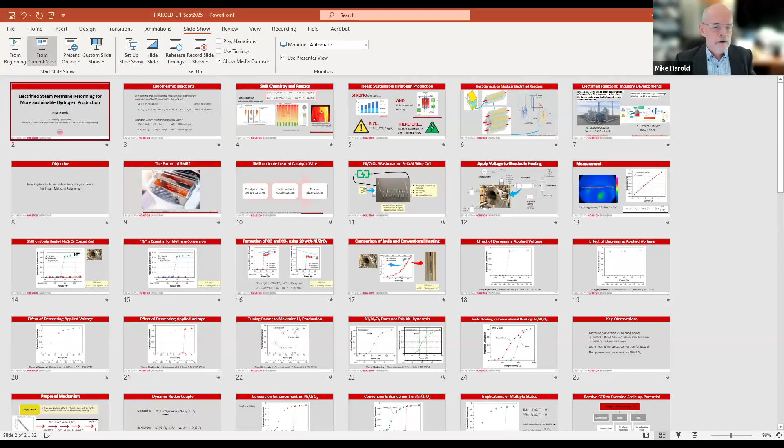All right, again, thanks for joining. I'm going to spend the next 40 minutes or so talking to you about hydrogen and what looks to be a potential new way to make it a more sustainable product.

As we all know, hydrogen is a very important molecule in the energy and petrochemical space, and some believe it's the energy of the future. That will remain a debate for the foreseeable future. Now, this work is done with my graduate student, Elmer Ledesma, who is on the call today. We will have a Q&A at the end of the talk.

So let me proceed. As a background, as we all know, there are endothermic and exothermic reactions. A large host of industrially important reactions require significant amounts of heat to bring the reaction up to temperature and to overcome equilibrium limitations. I'm denoting that by an A plus B kind of reaction.

Now, the way industry conventionally provides the heat or energy to enable the preheating and then overcoming the heat of reaction is through combustion. I'm denoting that here by an oxidation reaction with a much more negative delta H compared to a potentially very large delta H for the desired reaction.

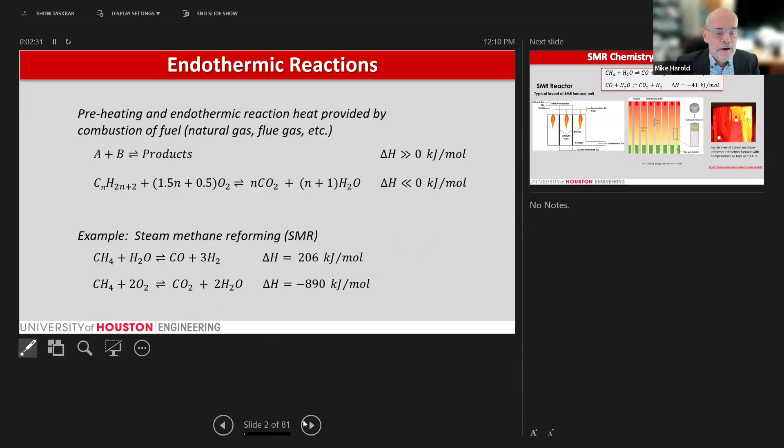Now, I'm going to spend the entire talk talking about steam methane reforming, or SMR for short. That's a very important endothermic reaction in industry. It's the main route to hydrogen. It has a delta H of 206 kJ per mole of methane reacted, compared to combustion, which, if one considers the same reactant oxidized to generate the heat, generates an exothermic reaction heat of 890 kilojoules per mole. But it also generates carbon dioxide, another very important molecule.

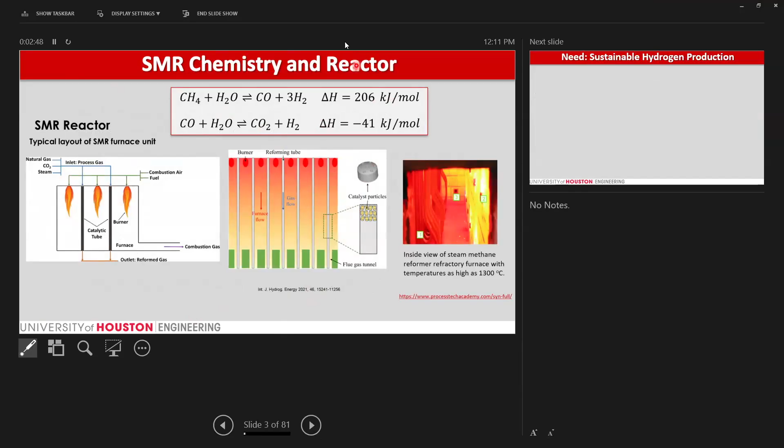Hey, Mike, your presentation is not in presentation mode. Oh, sorry, display settings. Okay, right, thank you, so do the swap.

Yeah, okay, thank you. So methane steam reforming main reaction is shown here, generating 3 moles of hydrogen per mole of methane reacted. It's endothermic and more favorable at high temperature, obviously. Now, a side reaction is the infamous water gas shift reaction. It converts CO basically to CO2 and is thought to approach equilibrium at high temperature, but it's a mildly exothermic reaction.

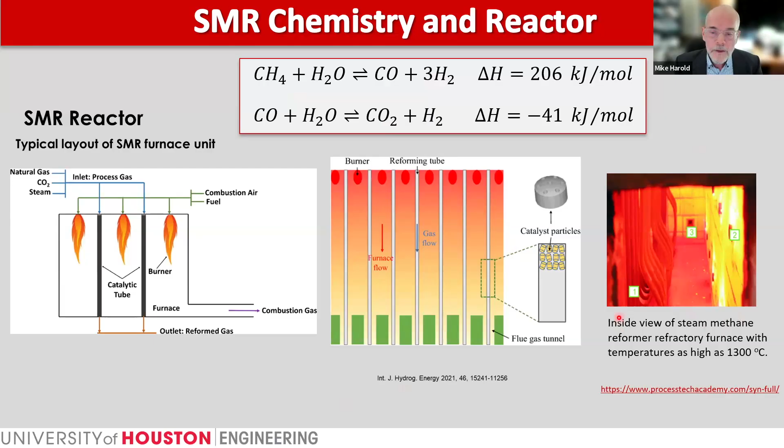Now, industrially, these reactions are carried out in tubular, packed, catalyst-packed tubes, many of them put into a combustion box where the chemistry is carried out. Temperatures as high as really 1300 degrees centigrade are obtained in this hot box where a fuel is burned, generating carbon dioxide. And that's the way it's been done for many decades.

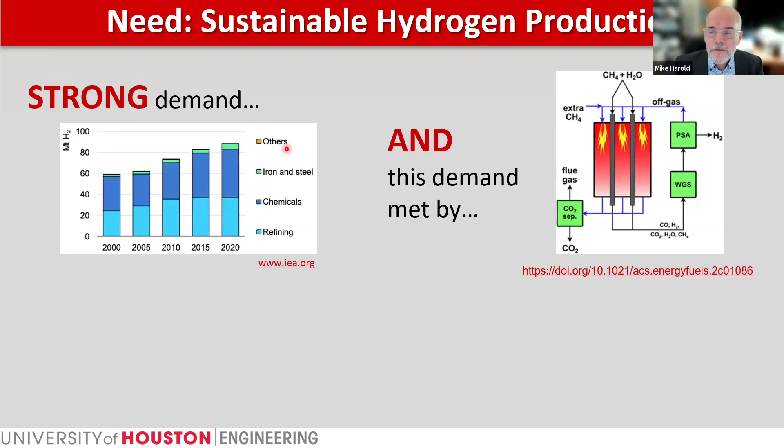But that's done in an unsustainable way from a CO2 standpoint. This is a huge carbon footprint process. Nominally 10 kilograms of CO2 are produced per kilogram of hydrogen generated. And this poses a real challenge. So how can we reduce that number down to a manageable number to make hydrogen more sustainable? And that's where decarbonization comes in.

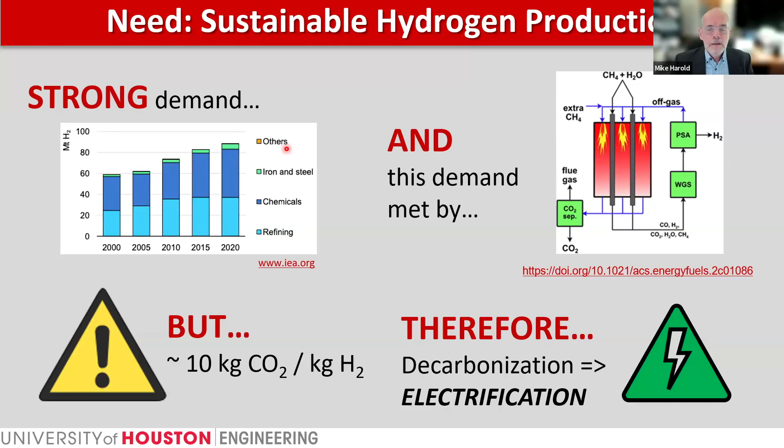So the Energy Transition Institute, one of the main topics of interest is decarbonization, and in particular, electrification. Now, the argument is that if one can provide heating through electrification and the source of the electrons are renewable electrons, then we potentially can take down this low-hanging fruit and make SMR more sustainable.

Now, my colleague, Professor Vemuri Balakotaiah, published a paper with Ram Ratnakar from Shell a few years ago in AIChE Journal and proposed a new mode of carrying out endothermic reactions. Their particular focus was ethane steam cracking, but SMR would certainly be in the same family of reactions.

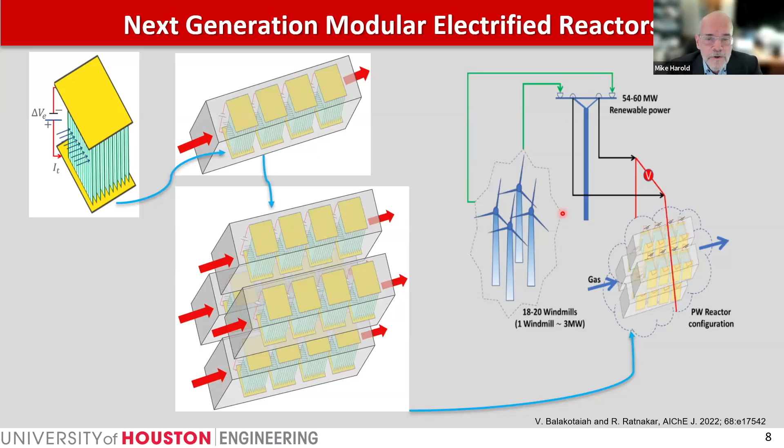Their argument is connecting modules of reactors to electricity sources such as wind and solar, which obviously are renewable sources generating minimal CO2. Those electrons are then used to ohmically heat substrates wherein the catalyst is either deposited or in the same locale as the heaters. So in principle, the idea is to replace combustion as the energy source with ohmic heating from renewable sources going forward.

Now, this is an active area of research. Dow and Shell are teaming up, as are BASF and SABIC with Linde. These are European projects where electrification is being used to do steam cracking of ethane to ethylene, the main route to commodity chemical ethylene.

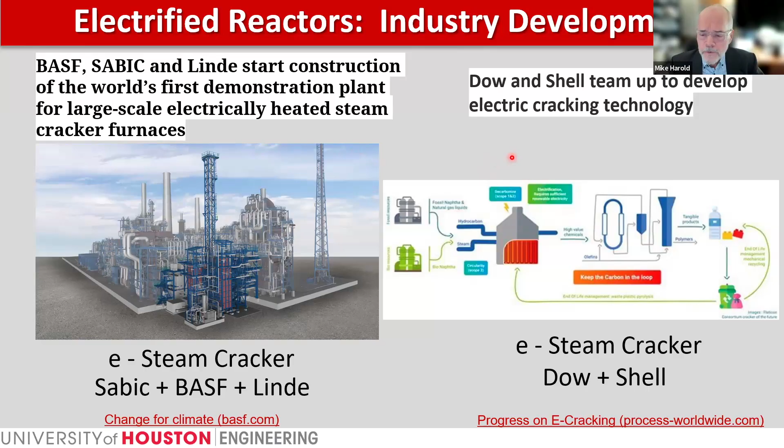That also being a strongly endothermic reaction, the thinking is to make that process similar to SMR more sustainable. The approach these companies are taking is to use metallic tubes ohmically heated using resistive metals, packed with catalyst in close proximity to the hot wall, as opposed to bringing heat in through a furnace box. So these are ongoing and really exciting projects.

Now, the objective of our research, which over the past few years was supported by Shell, is to investigate a Joule-heated coated catalyst concept for steam methane reforming. I'm going to walk you through some experiments that Elmer carried out and our ideas about what we're observing, which I think you'll find pretty intriguing, like we did when we went into this project.

Now, how complicated can it be? This is not to be too facetious, but just to emphasize a point. We all know ohmic heating from our everyday lives. This is a toaster. You pass current through a resistive metal. It glows and gets very hot due to the friction imposed by flowing electrons through the metal lattice. Joule heating is well known.

Now, our idea is, taking a cue from these wires shown in the toaster, what if we coat these wires with catalyst, SMR catalyst namely, and carry out steam methane reforming on an electrically heated and coated wire? So that's the idea.

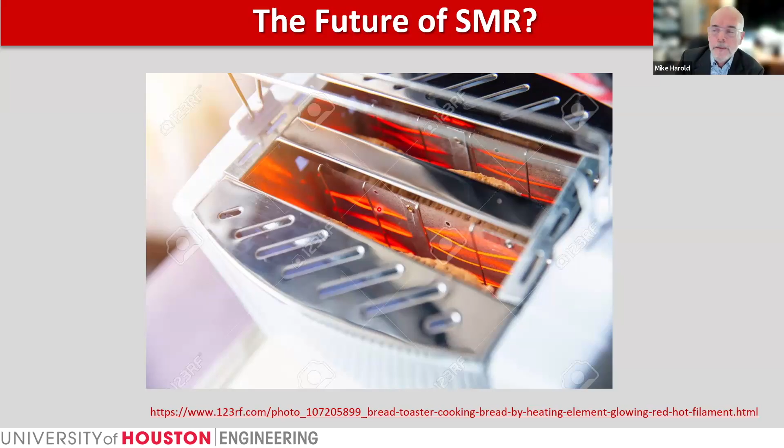Okay, so I'm going to walk you through our experiments. We work from the ground up. We prepare catalyst and test it in a lab scale reactor, then make observations and learn from these measurements at a fundamental level, but more importantly, come up with some ideas on how this might be scaled up if it works.

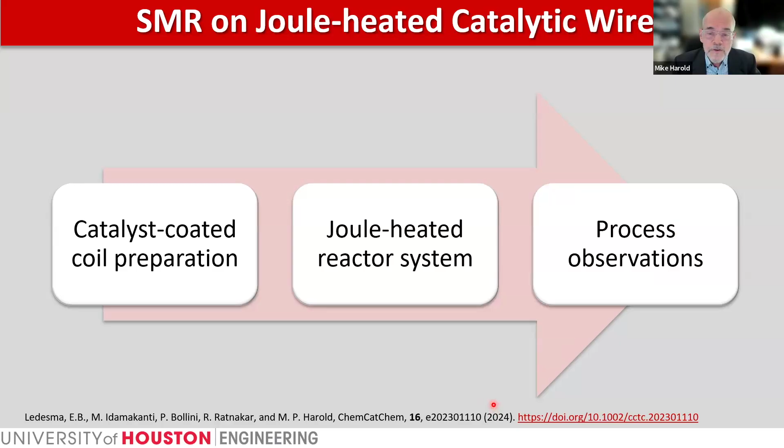For those of you interested, we have a paper published in 2024 that gives some of our earlier results from this project. Today I'm going to show some of those and some recent measurements that Elmer has made in the lab.

Now, we start with a coil. This is an iron, chromium, aluminum metal, otherwise known as Kanthal. It's a common material that has the right kind of conductivity range wherein one applies a voltage across the wire and it heats up to a temperature of interest. This is basically the reactor in the experiments we're doing, about 0.5 millimeters in diameter. This particular wire is about 45 centimeters long with 11 turns.

For those electrically engineering interested folks in the audience, this is basically a solenoid. One can produce a magnetic field by putting current through this coiled wire. I'll get back to that a little bit later.

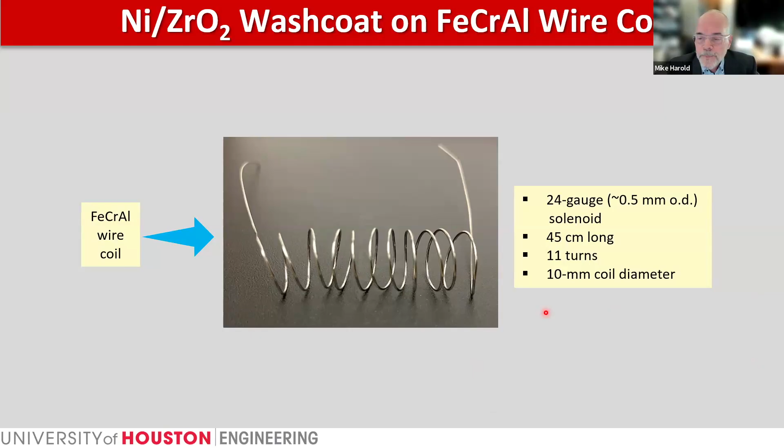Now, the experimental setup is straightforward. First, we make the catalyst. The catalyst will be nickel-based on either zirconia support or alumina. The choice of the support, as I'll show today, is critical.

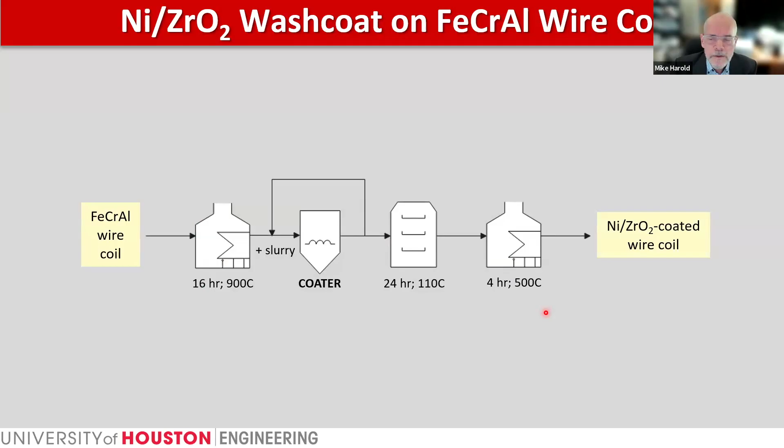Now, we do this coating in Professor Praveen Bollini's lab with his student Meghana, producing a coated FeCrAl wire with a very thin layer of nickel zirconia. The wash coat thickness, depending upon the gravimetric loading, the mass per area, is nominally 10 to 20 microns thick, not unlike the wash coat we would see in a catalytic converter in our car.

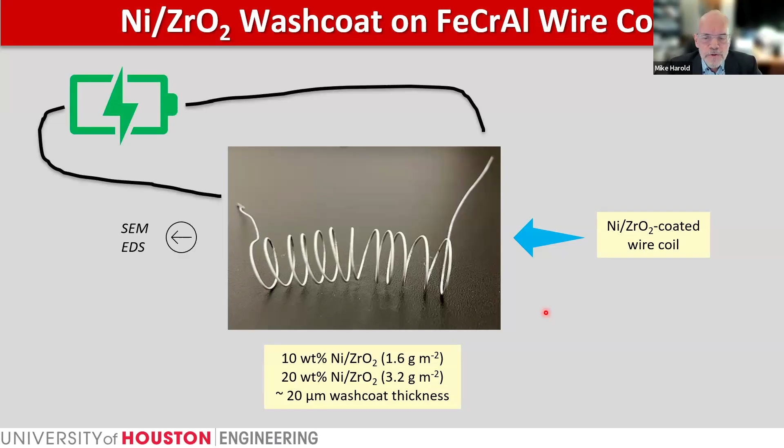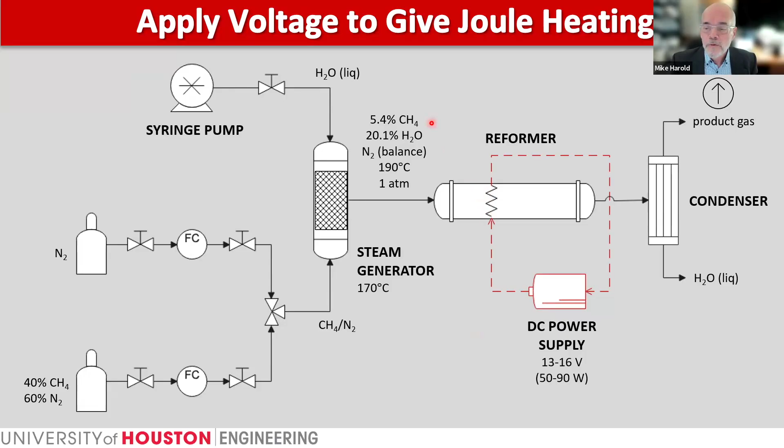Using a somewhat diluted methane steam reforming feed of nominally 3 to 4 steam to methane ratio. We do some preheating, and then the bulk of the heating is done by the ohmic process, the Joule heated process. This is a picture of the coil spanning the cross-section of the tube.

This is not a well-designed reactor. When you look at it immediately, you can see there are potential regions for bypassing. Just envision that the ultimate reactor would be a staggered line of these coils down the length of the tube. The experiments we carried out have been so far with a single coil.

So we apply a DC voltage in the range of 13 to 16 volts. That produces a power for the given resistance of the FeCrAl of between 50 and 90 watts. We then collect the effluent and characterize the unreacted methane, the produced CO and CO2.

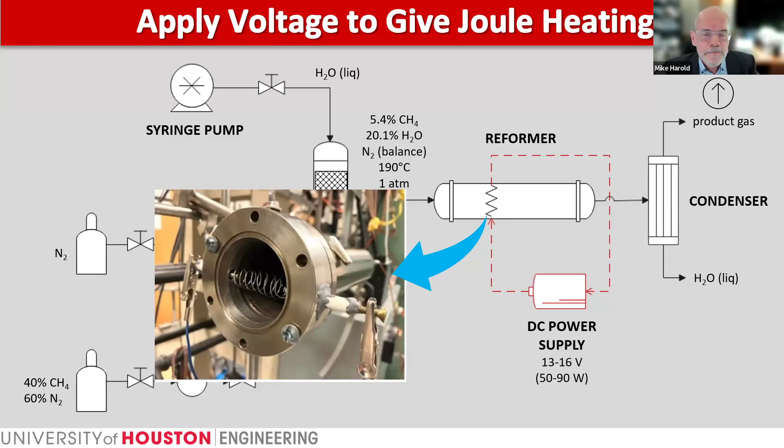Now, this is an infrared camera measurement of a straight wire in which we've applied nominally a few volts across the length of this shorter wire, showing the temperature exceeding 450 centigrade. On the right is the measured temperature, which is a linear function of the current, with the standard expression for I squared, V squared over R.

So an energy balance for the non-reacting wire would include radiative losses, convective removal of heat from the wire, balanced by the ohmic heating. One can solve this equation for temperature and get very good agreement between the measured average wire temperature and what simple theory predicts.

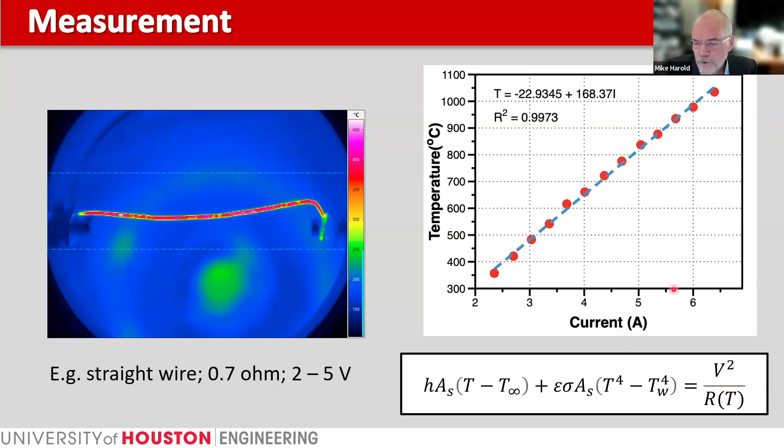So let me show you some results. This is literally one of the first experiments that Elmer ran, for a 10 weight% nickel on zirconia support that's coated on a FeCrAl wire, then subjected to a range of imposed power between 50 and nominally 90 watts.

Along with the coated wire is the uncoated wire, shown in the red squares. The green line for this particular set of conditions is the predicted equilibrium conversion. There are some notable attributes of these data. First, as we would expect, the conversion goes to a high value at sufficiently high temperature.

The temperature measured or predicted by that energy balance shows that upwards of 800 degrees centigrade, pushing 900, the conversion of methane approaches 90%. That is not an unexpected result. We expect an endothermic reaction whose rate increases and whose equilibrium becomes more favorable to have a conversion approaching, hopefully, completion.

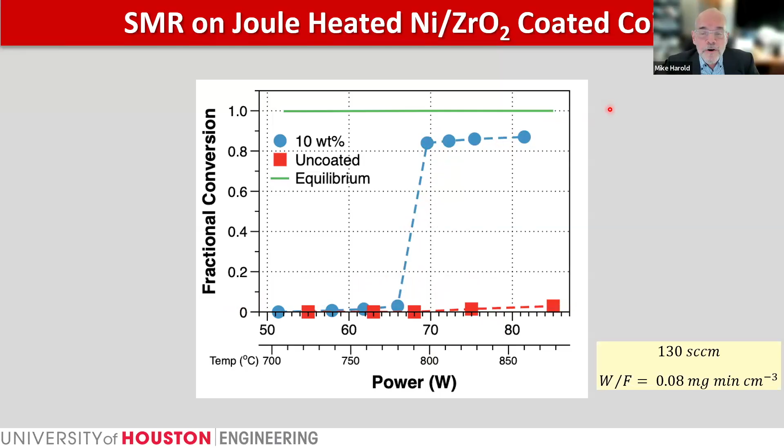Interestingly, we observed this sudden discontinuity in the conversion versus the imposed power or temperature, which was kind of an unexpected result. We went into the experiment thinking we would get a nice, smooth sigmoidal curve from a low conversion regime to a high conversion regime. The focus of this talk is going to be on this discontinuity, in large part, as you'll see as I walk through the data.

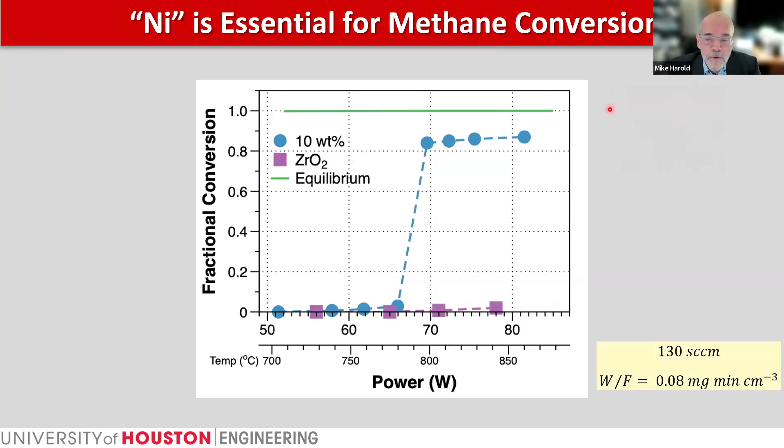So we compared the nickel zirconia to a nickel-free zirconia to check for sure that the nickel is the source of the activity. And indeed, this is the zirconia without nickel, showing very low activity at higher temperature.

The measured CO and CO2 per mole of methane fed is shown on the left and right, and you can see that the results follow quite nicely the predicted equilibrium distribution of CO and CO2.

What's kicking in at higher temperature is the reverse water-gas shift reaction, where produced hydrogen is reacting to push the CO2 back to CO. That's why we get a maximum in the CO2 yield and an increasing CO yield with increasing temperature.

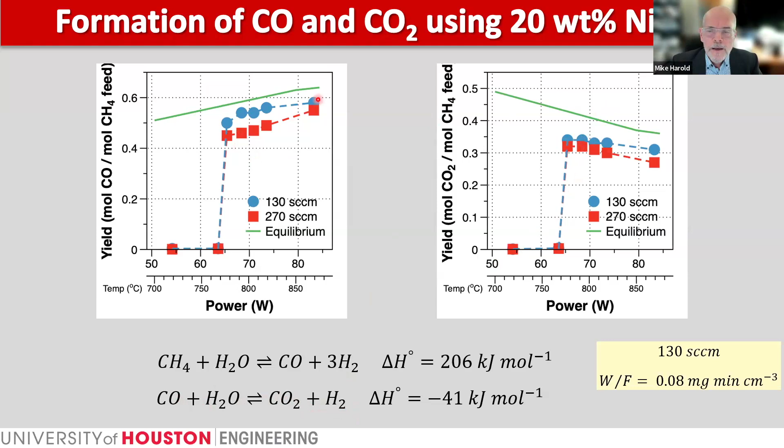Now, what's going on here? I'm replotting the nickel zirconia data in blue, obtained with the ohmically heated wire. I didn't mention that the gap between complete conversion and nominally 90% we attribute to bypassing through the spaces in the cross-section of the tube closer to the wall — unreacted methane that is not seeing the catalyst, quote unquote.

Now I'm comparing these data to what I would call a conventionally heated wire. In this case, Meghana from the Bollini lab took the same length wire, snipped it up with scissors, put the pieces into a tube, and carried out a more normal fixed bed reactor experiment where the heat is provided through the wall within a conventional clamshell furnace.

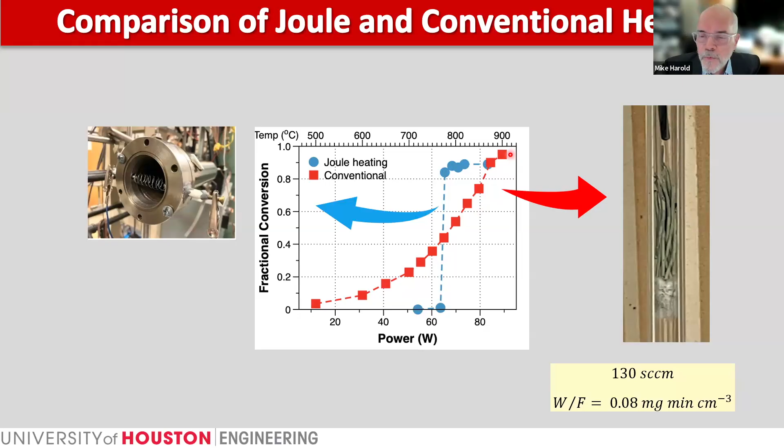Interestingly, you can see notable differences between what we had expected to see in the red and what we did see in the blue with the ohmic heating. At very high power, the conventionally heated wire approaches complete conversion, as you would expect, with no bypassing. So we see the bypassing difference out here.

At lower temperature, we get the conventional setup outperforming the ohmic heating, but interestingly, there's a range of power where the ohmically heated wire outperforms the conventionally heated wire. That was a puzzling result at first, and that's what I'm going to try and walk you through — our thinking.

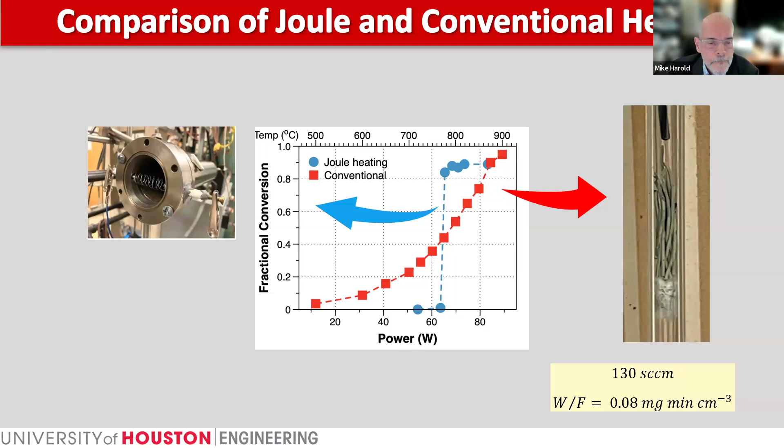Now, I prodded Elmer because I have an interest, over the years, in other projects involving what's called steady state multiplicity, where reactions and reactors exhibit multiple steady states, manifested typically as hysteresis phenomena.

The puzzler here is that, as we know, methane steam reforming is endothermic, and conventionally it's only exothermic reactions that exhibit this thermal feedback effect leading to multiple steady states. So keep that thought in your mind as I continue to walk through the data.

Now, Elmer continued to slowly reduce the power and measured steady state conversion that went beyond the ignition power, nominally about 56 watts, to a much lower power, down to nominally a little bit less than 15 watts, where the reaction died. So for a pretty wide range of power, the catalyst can either exist in a very low conversion state or a much higher conversion state.

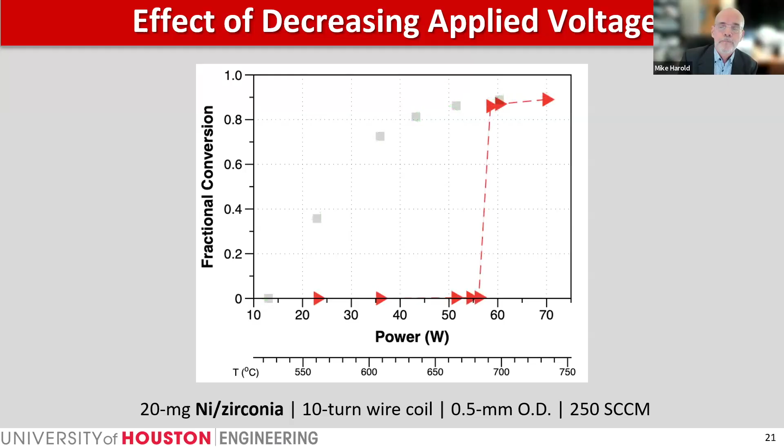Interestingly, before I get to some mechanistic aspects, if one calculates the moles of hydrogen produced per kilowatt hour supplied, which Elmer has done, it's interesting to note that there's a kind of maximum utilization of the provided energy, electrical energy, through Joule heating that maximizes the production of hydrogen along this high branch. Too high of a power leads to diminishing returns as the conversion approaches completion. Too low of a power does not produce enough hydrogen. There's actually a sweet spot where one gets a nice balance, or a maximum in the hydrogen production or energy utilization.

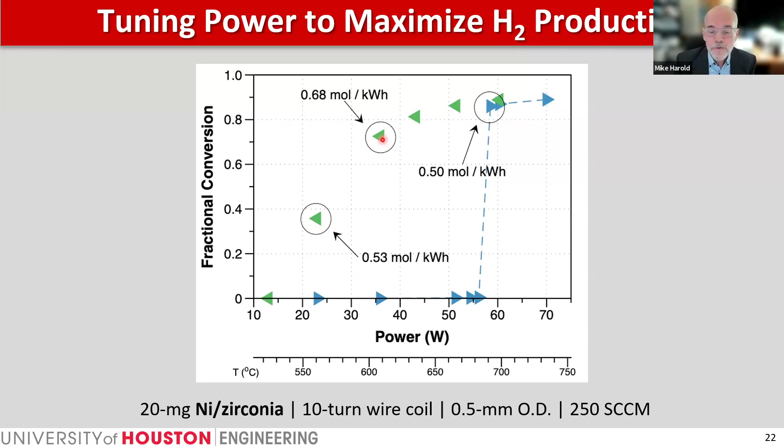Now, let me show you a few more observations in Elmer's set of experiments. We decided to go and compare the zirconia catalyst support to alumina, which is actually a more conventional support for steam methane reforming catalysts. Interestingly, when we carried out similar experiments with the FeCrAl wire, now coated with a nickel alumina catalyst with the same amount within experimental error, whether we increase power or decrease power to that coated wire, we do not see any weird ignition, nor do we see multiple steady states. So a notable observation here is that the support does matter, and it is playing a role in these interesting observations that I've presented to you so far.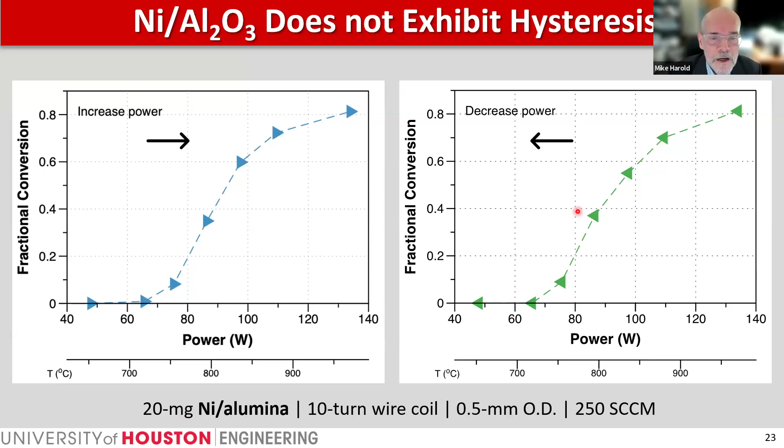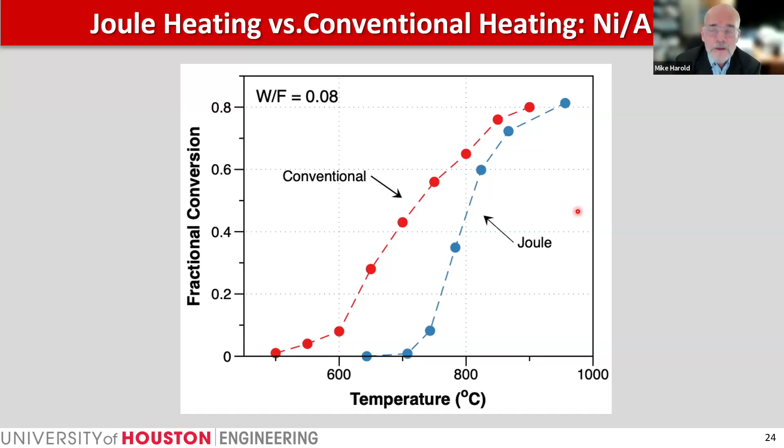Now, additionally, with alumina, we never see a range of temperature wherein the Joule heated wire outperforms the conventionally heated wire. The conventional heating always gives a higher conversion of methane at a given temperature than the Joule heated wire when alumina is the support. Again, that is not the case with zirconia, as I showed you earlier.

So let me stop here and kind of recap the data that I've shown you. First of all, the methane conversion versus applied power for nickel zirconia exhibits an abrupt ignition and steady state hysteresis of methane conversion versus power/wire temperature. On the other hand, nickel alumina shows a more conventional unique steady state. Furthermore, the Joule heating for nickel zirconia enhances the methane conversion over a range of power settings, but there's no apparent enhancement for nickel alumina.

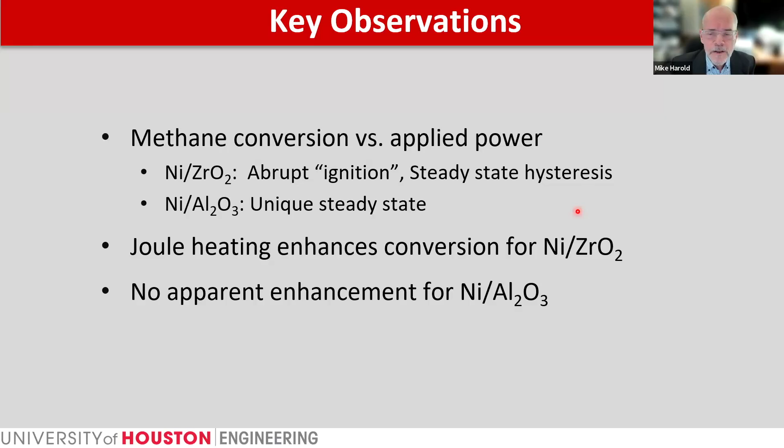So really, what's going on here? We have multiple steady states, not expected for an endothermic reaction. We have an important effect of the catalyst support. We have no apparent activity of a wire that does not have nickel as part of the coating. And again, there's a notable difference between the catalyst support on which the nickel is impregnated.

So what's going on? Well, that's going to lead us to a mechanism, and we've considered several mechanisms. This one, we believe, checks all the boxes, but it's definitely up for debate. So let me walk you through our hypothesis. We believe what's happening here is an electrocatalytic effect.

In essence, conduction within the zirconia support layer serves to reduce nickel cations to nickel metal, increasing activity. Now, that statement implies the fact that it's known in the literature that reduced nickel, instead of say nickel oxide or nickel hydroxide, is more catalytically active for SMR than is the oxide or hydroxide. So we're hanging our hat on that known fact.

Now, let me walk you through what we think may be happening. So this is a schematic of the interface between the underlying FeCrAl wire and the nickel zirconia. It's obviously not to scale. So this line here is the interface. Again, the thickness of this support layer or catalyst layer is tens of microns. The FeCrAl wire, on the other hand, is about half a millimeter in diameter. So it's a thin layer.

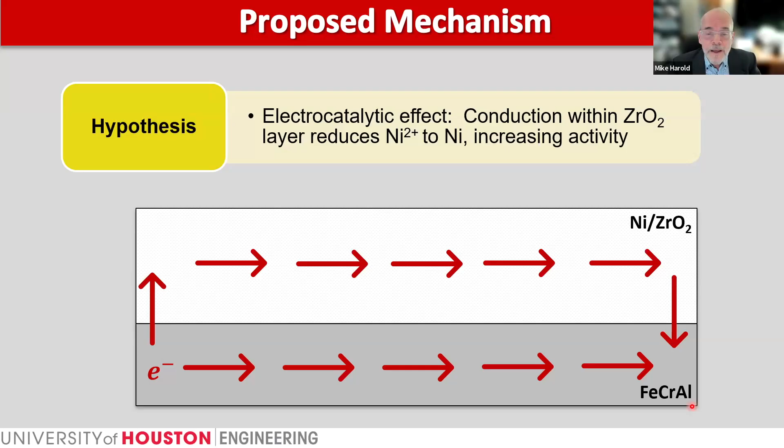Now, under conditions of applied voltage, the electrons are obviously flowing through the FeCrAl because this is leading to an excessive heating of this resistive metal. What we believe is happening is that some of the electrons, to be quantified, are diverted through a nominally conductive zirconia layer that's supporting the crystallites of nickel catalyst. These electrons are interacting with the nickel in a reductive sense, leading to enhanced activity.

Now, why do we say that? Well, zirconia is actually in the class of semiconductors. It has a conductance shown here in some data from the literature, kind of an Arrhenius plot of conductance versus 1/temperature that is activated. So increasing temperature leads to higher electrical conductivity of zirconia, unlike alumina, which is more of an insulator. So what we believe is happening is as we increase the power to the underlying FeCrAl, when we reach a certain temperature of the catalyst wire, and hence the top layer, the zirconia becomes somewhat conductive, enabling electrons to flow through it, which contacts the electrons with the nickel cations.

As a result, the electrons have the opportunity to do an electroreduction of the nickel oxide/nickel hydroxide to nickel metal. And as I mentioned a few minutes ago, the nickel metal is known to be a more active catalyst for SMR than is the cationic-based nickel. Now, this is a conjecture that we have to prove, obviously.

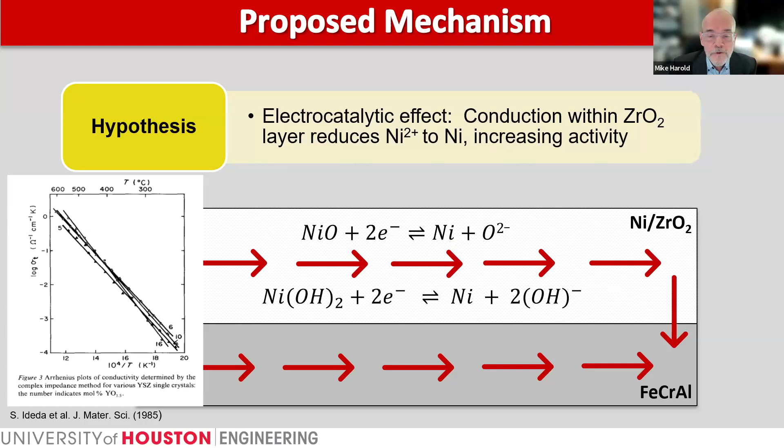But this looks to be an explanation for the observations I've shown you so far. So we essentially have a dynamic redox couple, we believe, in the top layer that involves directly electrical current. The reduction, which I'm reproducing here, could be represented by nickel hydroxide being reduced to nickel metal, producing hydroxide anions, which then can undergo further reaction.

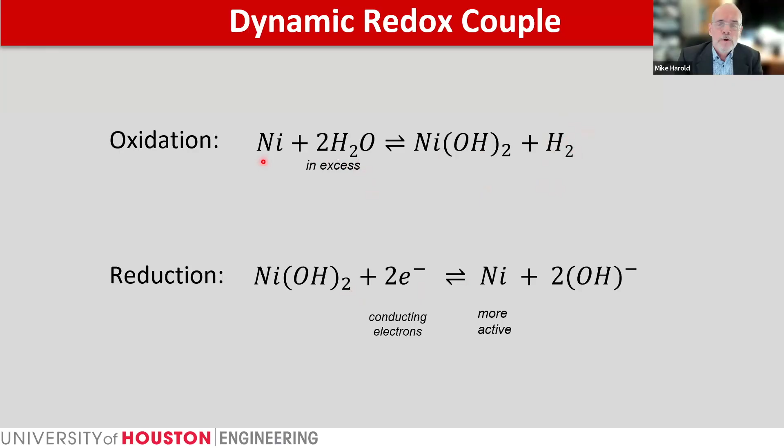So Elmer came up with a clever experiment and asked the question: well, what is the role of hydrogen here? We do know that it's the main product from the SMR. Is it possible that the hydrogen that's being generated is pushing this reaction to the left? Well, one way of testing that is to add hydrogen.

So I'm now re-showing data that I've shown you earlier. This is for a particular 10-turn wire coil. The flow rate here is fixed at 250 cc's per minute. The green triangles are obtained on the nickel zirconia, and these are steady states that we believe exist because of the electroreduction of the nickel oxide and nickel hydroxide. Interestingly, when we add a small amount of hydrogen to the feed, nominally 2%, remembering that the feed methane concentration is 5% and steam is approaching 20%, we get the blue circles.

So we basically follow the same trajectory of the conversion that we obtain in the absence of hydrogen. Now, that may not be a surprise, but what is notable is that with the addition of hydrogen, the lower steady state is completely removed. So this red lower steady state with the ignition obtained without hydrogen addition is no longer present. And so in an experiment starting at low power and proceeding to high power, we follow basically this high branch that would only exist at lower power when hydrogen is not added. But with hydrogen added, we follow this trajectory.

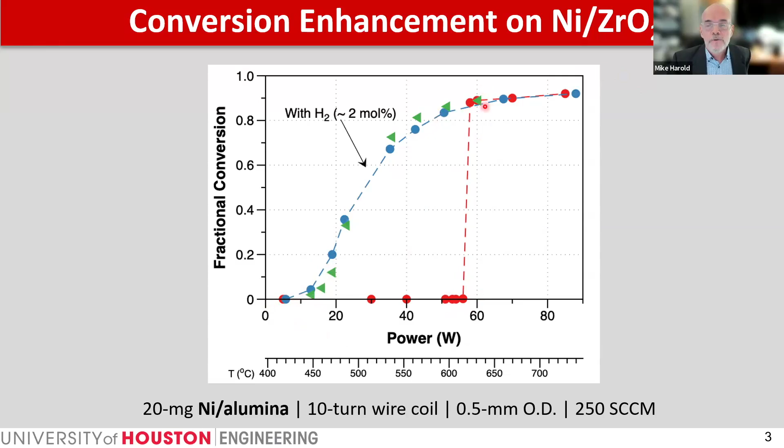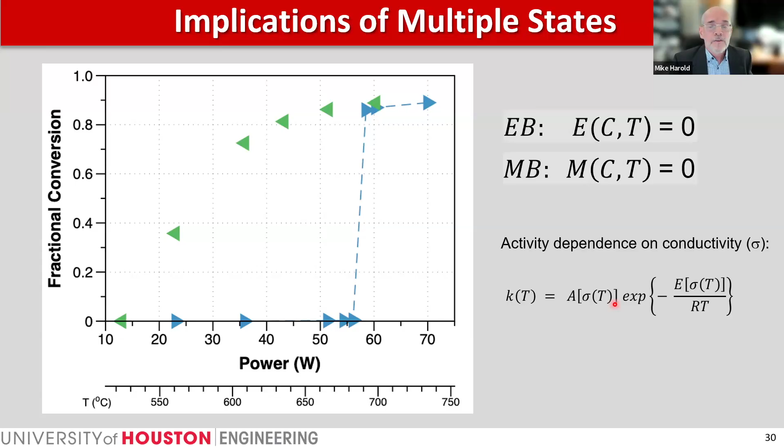Now, interestingly, from a fundamental standpoint, we have to answer this question, which we've not yet answered: how can we actually predict the existence of multiple steady states for an endothermic reaction? What I'm suggesting here is something we still need to do, but we believe that we're getting catalytic enhancement due to the flow of electrons through the catalytic layer, which is serving to affect the activity of the nickel catalyst. One way of testing that would be to semi-empirically make either the activation energy or the pre-exponential factor a function of the conductance, which itself is a function of temperature, and to put that into the energy and material balances and see if the resulting mathematical model exhibits or predicts multiple steady states. We've not done that yet, but we will be attempting that in the coming weeks.

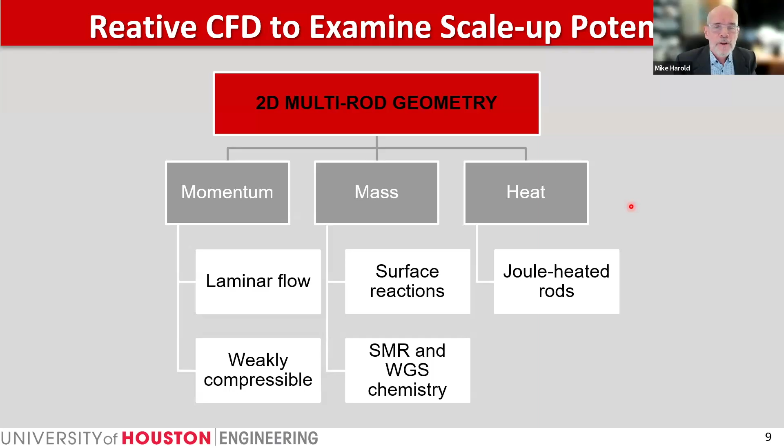Now, I want to finish off the last few minutes just showing that we're not stopping with experiments. We're doing some simulations. Elmer is applying COMSOL with good old reaction engineering analysis to analyze different variants on the reactor that we envision could result from this electrically heated wire experiment that was confined to one wire.

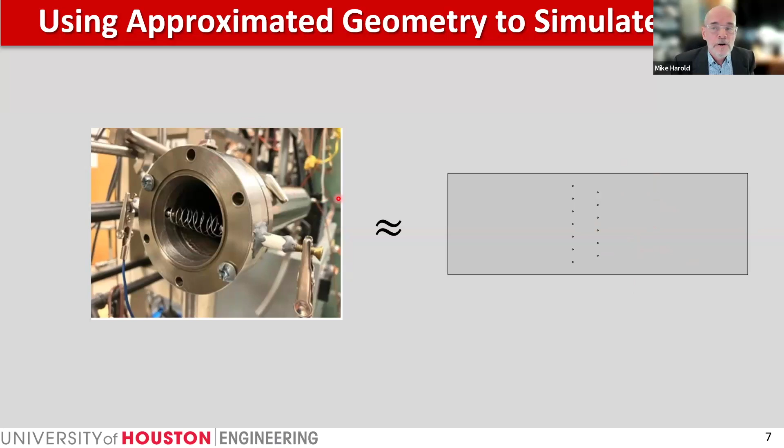Now you'll have to humor me, but I'm showing the experiment on the left with the coil and arguing that in a two-dimensional envisioned reactor, looking at it from the side, we would have a set of rods or wires that are parallel to one another and staggered in two layers here. Our approach in the synthesis of possible reactor types is to cascade many layers of wires along the length of the reactor tube to simulate a multi-wire or multi-rod reactor. So the approach that we take is to take known kinetics of SMR from the literature.

This is from the Guy Marin group in Belgium, from AIChE Journal. We take those kinetics, put them into the material balances appropriately. We have energy balance, diffusion and reaction within the catalytic layer. And then COMSOL allows us to simulate the local environment of the coated wire.

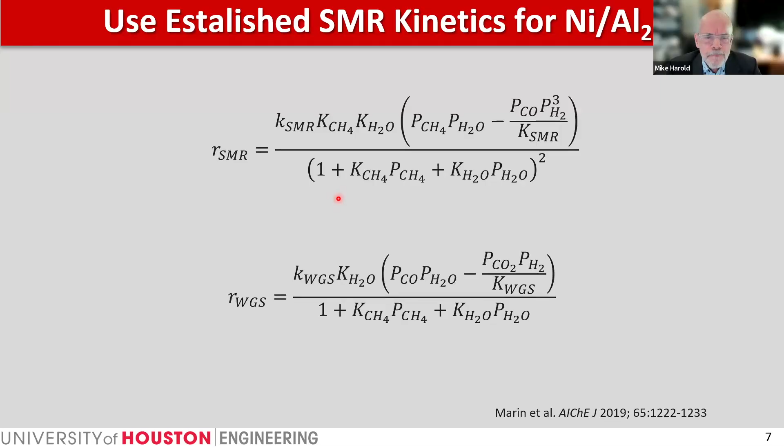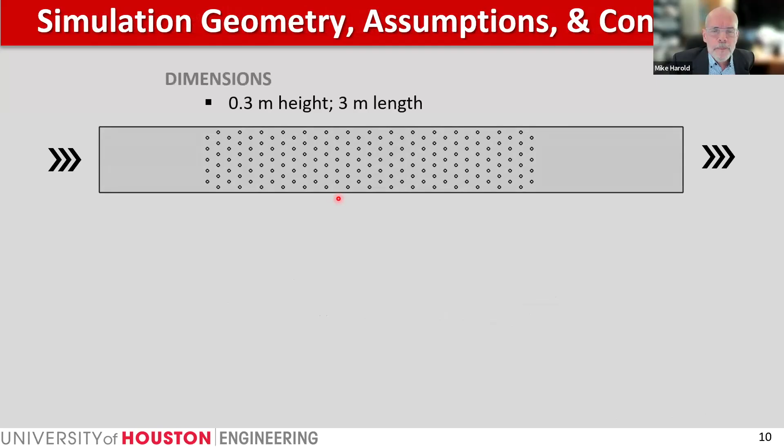Wires, I should say. Now, our envisioned reactor is shown here schematically. So we have flow from left to right. These are all rods in this case. Here's our inlet conditions, and I'm just showing you some results of some simulations with these conditions in mind. So a 30% methane, 70% steam with these conditions coming in, preheated, atmospheric pressure, fully developed flow, and here's the volumetric flow rate.

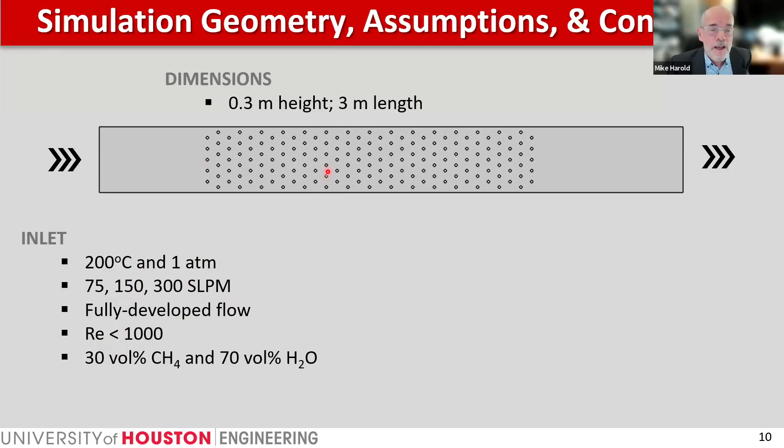This is a two-dimensional reactor where the catalyst rods are coming out at us from the screen here. So these are 170 Kanthal rods that are half an inch in diameter and coated with nominally 20 microns or so of nickel supported catalyst.

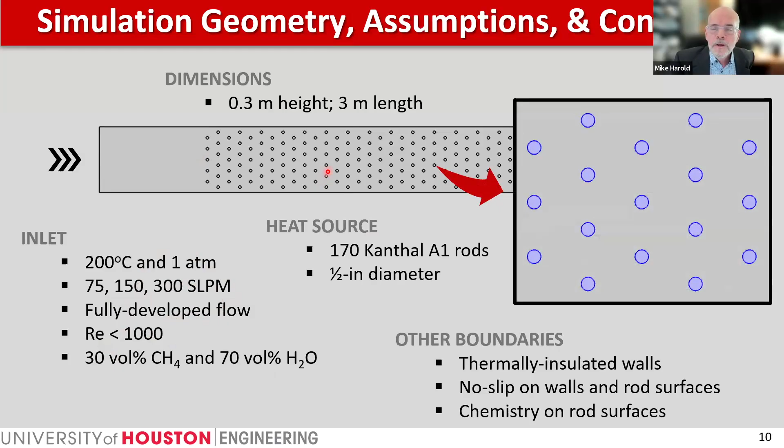The corresponding hydrogen profile is here. We can quantify the amount of hydrogen generated per mole of methane consumed. It's about 3.4 moles, so somewhat over 3, with the forward water gas shift participating in the generation of additional hydrogen beyond the 3 for SMR.

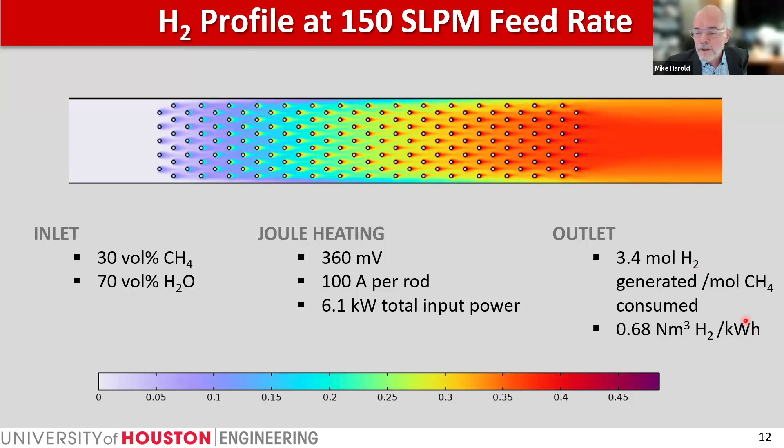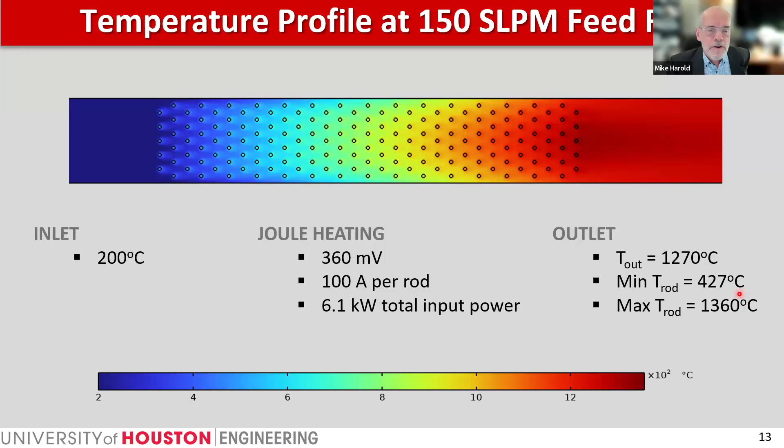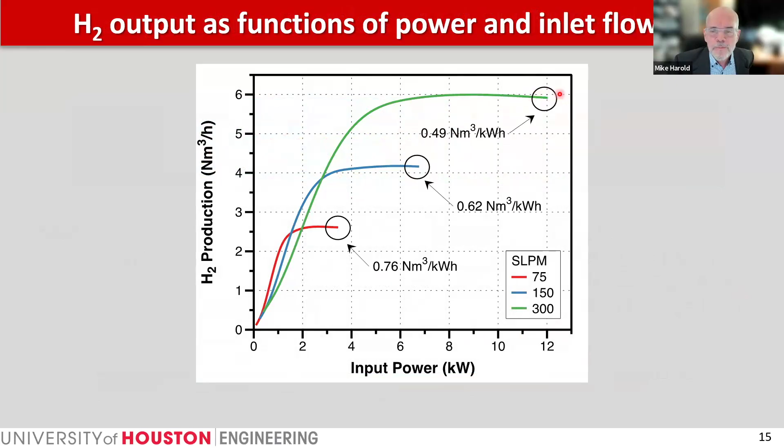So there's heating from left to right. Reaction is occurring along the length. Now here's the hydrogen productivity versus input power for 3 different flow rates. And as you would expect, the more methane that we put in, as long as we provide enough power, the more hydrogen we produce. And it kind of peters out because of equilibrium limitations that I've described.

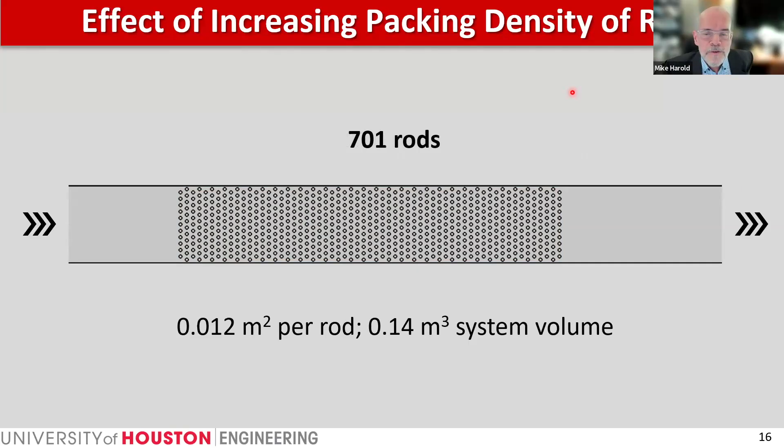Now, what happens if we increase the number of rods from 170 to about 700? So this is a kind of experiment on the computer where we look at a more densely packed tube with now 700 rods to increase the productivity of the same volume of reactor. Here's the results comparing about a factor of 3 or 4 more rods, going from a conversion of a little over 30% at this flow rate for the 170 rods to a conversion approaching 80% at a power setting of about 13 or 14 kilowatts.

Now, I'm showing you a discontinuity here because we cut off the simulation because the wire is getting too hot, and that would lead to a melting of the wire. So that's a self-imposed constraint on these computer experiments.

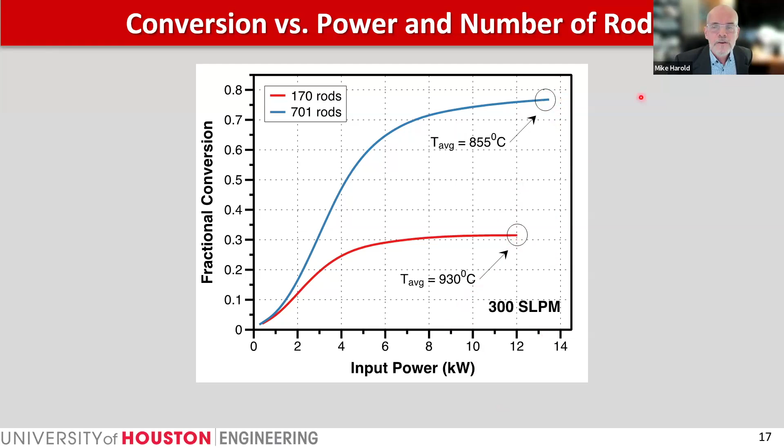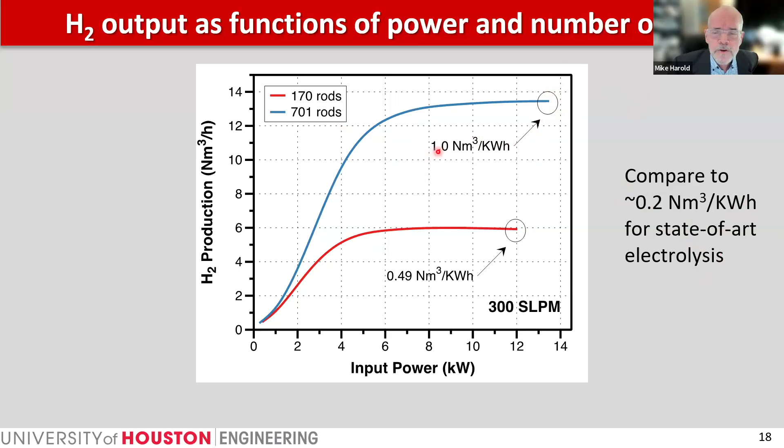Now, it's interesting to calculate the electrical productivity of the production of hydrogen for the two different densities of rods. And for the 700 rods, we're approaching about 1 cubic meter of hydrogen per kilowatt hour. It's interesting to compare that to state-of-the-art electrolysis, which is on the order more of about 0.2 cubic meters per kilowatt hour. And that's not a surprising result, but it's basically reaffirming that thermodynamically, it makes more sense to make hydrogen from methane than it does to make hydrogen from water. But it does suggest that from a scale-up standpoint that we can meet some interesting productivity levels with this kind of concept.

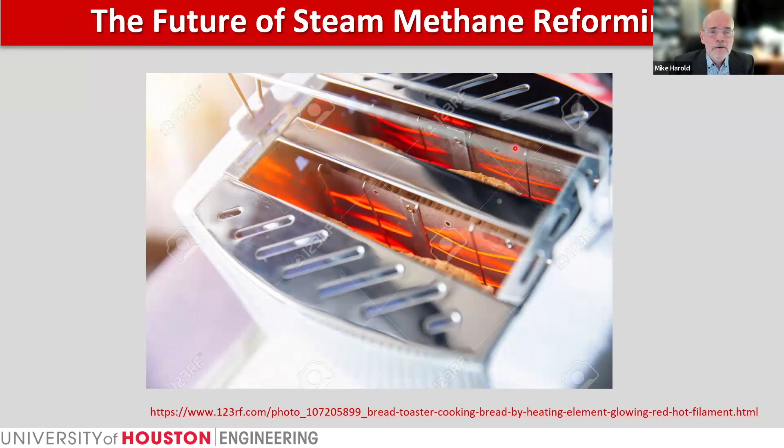So those are just a few of the simulations. Let me stop and leave you with a question. Is this the future of steam methane reforming, catalytic cracking, and other important endothermic reactions? That remains to be seen, but I think the results are encouraging, at least for SMR. We found an unexpected consequence of the imposed ohmic heating on the catalytic activity, and hope to have more insight into what we believe is happening as we move forward.